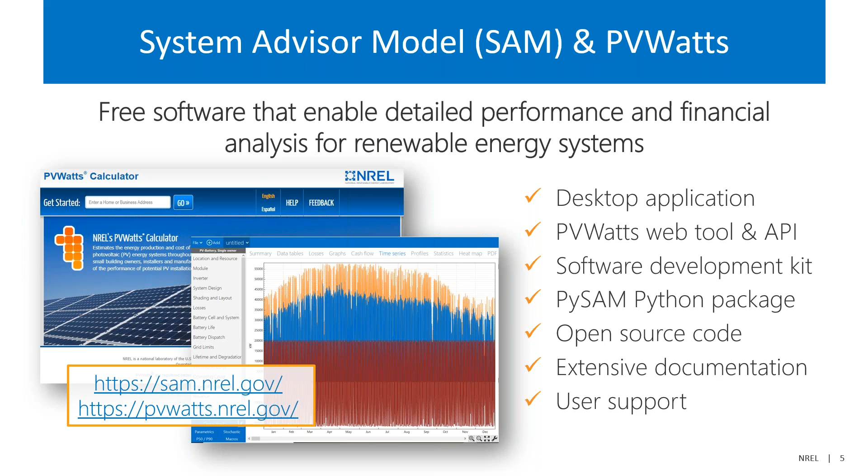SAM has a very large user base, and you can kind of tell that by the large audience that we have here today. Around the world, SAM is started once every 1.4 minutes. The PVWatts web API receives over 17.5 million hits per month. We have a very international audience, over 200,000 users in over 190 countries.

Some statistics there on our views for the webinars like this one, and plenty of external collaborators in industry such as Sunrun, Enphase, Southern Company, and more. You can see our Google Scholar citations of SAM grow year over year, and a largely US-based audience, but over half of our users are international outside of the US as well. So thank you all for using SAM and for being here today.

Just quick funding acknowledgements and some information about the tools we'll be talking about today. So these features were developed and input into SAM as part of a project with Sandia National Labs, as I mentioned previously. That work was funded by DOE's Solar Energy Technologies Office, SETO. This work happened between the years 2021 and 2023, and these features have been available from SAM version 2022.11.21 onward. So they became first available in 2022 and are still available as of today, the 2023 version.

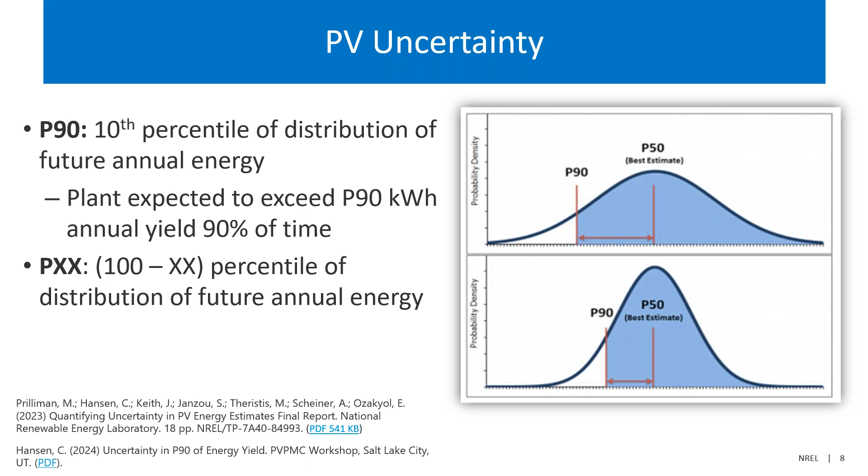So we're talking about uncertainty in the form of probability of exceedance. So when we talk about a P90 value, that is the 10th percentile of the distribution of future annual energy, or what the plant is expected to exceed in annual energy yield 90% of the time. That number could be for any value. For example, a P50 would be the 50th percentile of the distribution, or your best guess average annual energy yield, or it could be P10, P75, any of those values, just that percentile of the distribution of future annual energy yield.

We're focused on the uncertainty tools developed for the PV models, particularly the detailed PV model and PVWatts, which account for both the variability in weather and the lack of knowledge of future weather, in addition to model and parameter uncertainty. There are some uncertainty tools in other SAM renewable technologies, such as wind and other technologies, but those only calculate P50 and P90 based on the variability in the weather. Whereas the PV has uncertainty, as I mentioned, due to the weather variability year to year, the lack of knowledge of future weather, modeler skill, and the model and parameter uncertainty.

The big part of this project was to separate the uncertainty in PV yield estimates into two different categories. Aleatory, which is defined as uncertainty that cannot be reduced with improved measurements or models. An example of this is future energy that cannot fully be known. And the epistemic uncertainty, which is the uncertainty that we can reduce with more accuracy, better measurements, improved models, that kind of thing. And the example I have here is for temperature coefficients. So the key thing of this uncertainty feature is to look at the aleatory and epistemic uncertainties separately and combined to get a better understanding of what we can improve in our uncertainties and where the main uncertainty in the annual energy yield lies.

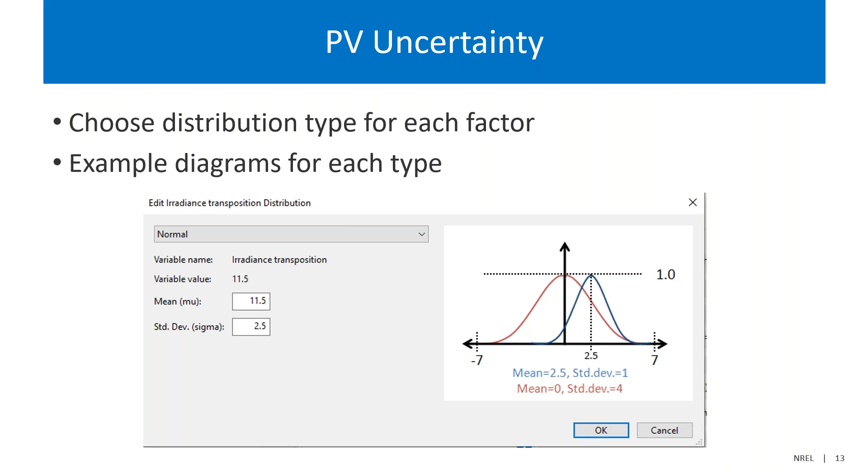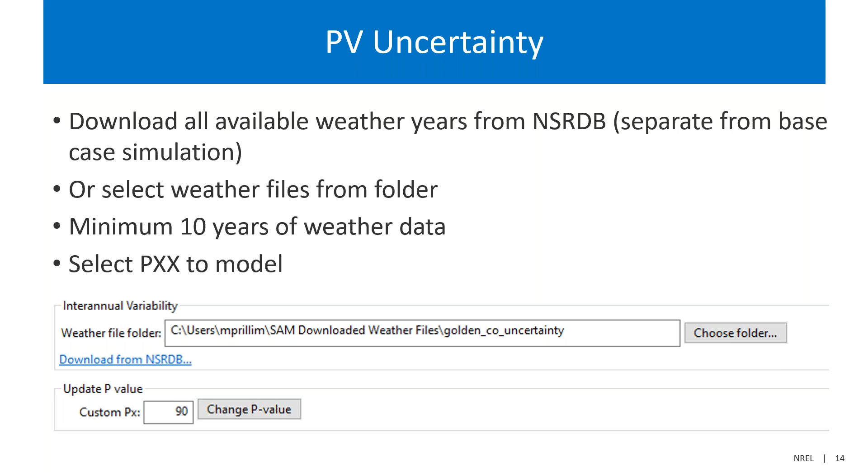From the uncertainty tool in SAM, which we'll get to in the demo in a second, you can import your own weather files. You need a minimum of 10 years of weather data to run these uncertainty calculations. Or you can, from the National Solar Radiation Database, an NREL product, download all the available years of weather that the NSRDB has for that site. And you can also modify which probability of exceedance value to model, whether it's a P90, P50, or what you want to look at in your results. And finally, when you analyze your results, you can look at the combined, aleatory only and epistemic only uncertainty results through different graphs, and then you can export the data and look at it that way. So we'll get to that more in the live demo.

So those are the slides. I will pause to let Janine or Paul let me know if there's any show-stopping questions to get to before we move over to SAM. None at this point. Go ahead and proceed. Okay.

So when you open SAM, this will be the front page that you'll see. I will start a new project. And under photovoltaic, you will have the option for detailed PV model and PVWatts. I will do the detailed PV model in this case. And for this example, I will use an LCOE calculator model just with a simplified financial structure. The uncertainty modeling that we'll go over won't have any impact on your financial analysis within SAM. It can be used externally, though.

So that will load in and you'll see a variety of different model categories here that'll be important for defining some of our factors. And then to look at the specific uncertainty tool, you'll notice under the simulate button, we have this uncertainty button. We'll click that and that will take us to our interface for the uncertainty tool. So I'll actually switch over to a different tab where I have one already started.

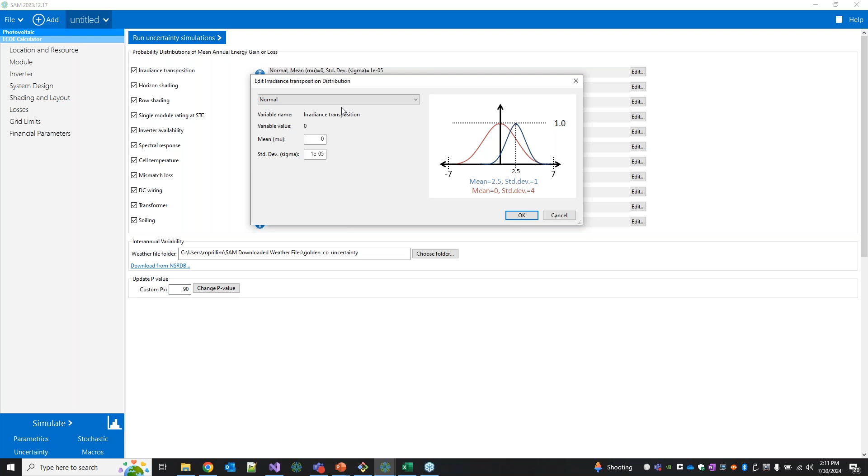So if I wanted to change one of these distributions, I would go to this edit button on the side here. I would choose from my different distribution types, whether it's normal or triangular or others. And I would specify the relevant variables and then click OK to set that change. Each one has a helpful descriptive text on these icons on the left to give you a better idea of what's accounted for in these categories.

And you'll notice that some of these, like the irradiance transposition, spectral response, and cell temperature are 0. And when I initially got this page, the boxes were checked. And that is because in our default SAM modeling, we are accounting for these models. We are running transposition models in our base calculations. We are accounting for spectral response in the base case simulations. And we are modeling cell temperature in those simulations. So as not to double count those, I was unchecking these boxes. This is an example of decisions you can make in quantifying these cases.

Other categories were not by default modeled in this case. A good example would be maybe if you're modeling, instead of using GHI or DNI and diffuse irradiance with a transposition model, maybe you're using measured POA. You might want to change this to account for the measurement uncertainty and how you got to that POA, plane of array irradiance, in your model.

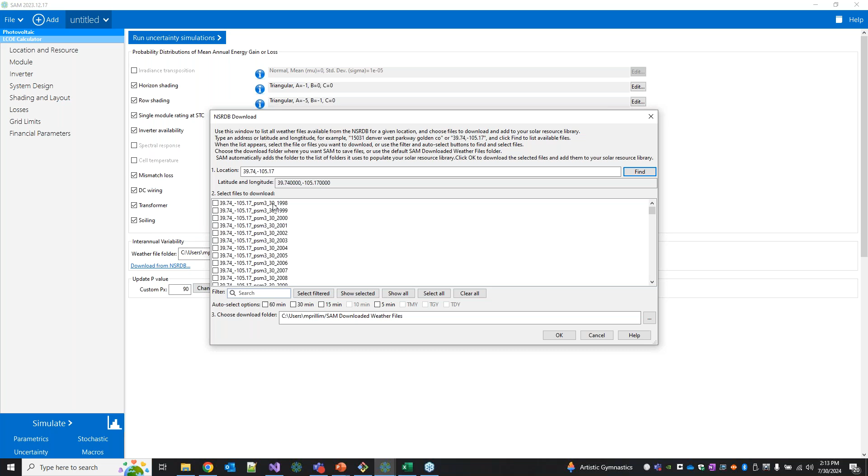Once we have these defined, you can look at your weather folder. You can choose a folder that has only the relevant weather for your system. So I have an example folder here with all the weather for Golden, Colorado. Or you can click this download from NSRDB down here, and you can search by your latitude and longitude for what weather data is available from the NSRDB for your system. And you can download all those into a folder from this interface. You can, as I mentioned in the slides, calculate P90 or change this value.

So when I finally have all this set up, I will click Run Uncertainty Simulations here. It's important to run this one. This Simulate button is for the base case simulation, whereas this is running our uncertainty calculations. So I'll click Run there.

I'll note that while this is running, for these types of cases, if you're running this initial case, it'll run faster without a detailed financial model attached to the PV. So that's why I ran an LCOE calculator case for this example. You could also run it without a financial model.

And then we can see results loaded down here. We have graphs for the overall uncertainty, which is the combined epistemic and aleatory results, only the results due to the interannual variability or the aleatory, and then the results from the epistemic uncertainty factors and that combined product P90 value. Each of these graphs has different bins with a percentage of data points within those bins on the left y-axis, and on the right y-axis they have a cumulative distribution function of all the different data points.

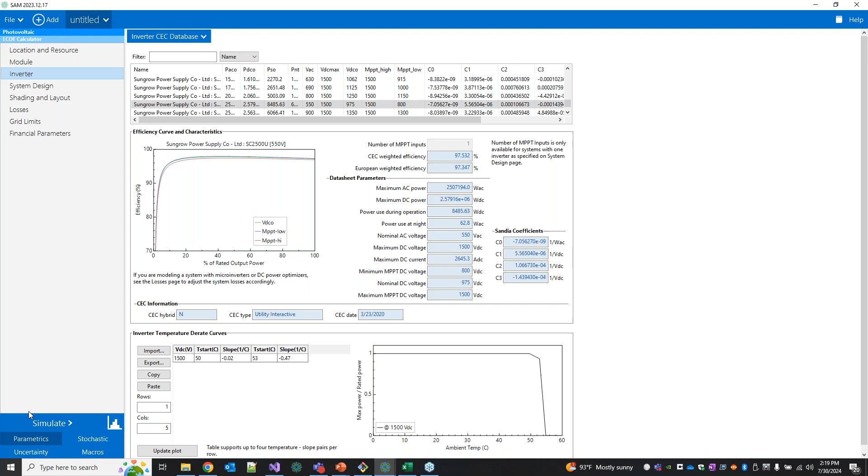And then if we click simulate on this base case, that will get you one annual energy result and basically one calculation. And then if we go to the uncertainty, this is looking at, let's say, 20 years of weather data in this example, times 1,000 samples, and that's getting you 20,000 estimates of annual energy, and looking at the uncertainty based on these factors and the different weather data.

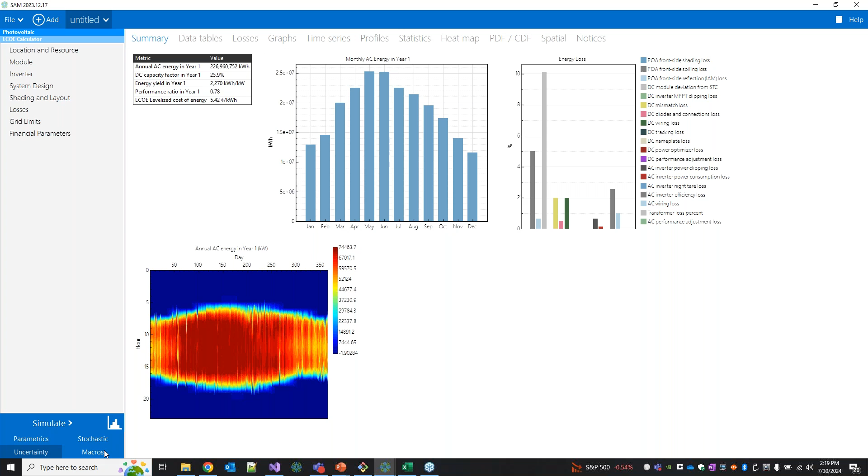So this has a lot more data, but this is only looking at annual energy, whereas when I click the base case simulate here, you can look at the results from that case with this little button to the right of it. You have more granular information on losses for that base case simulation and financial results if you're running your financial model here as well. So this uncertainty tool was built to focus on the uncertainty in the annual energy and look at those different probability of exceedance values for that annual energy yield.

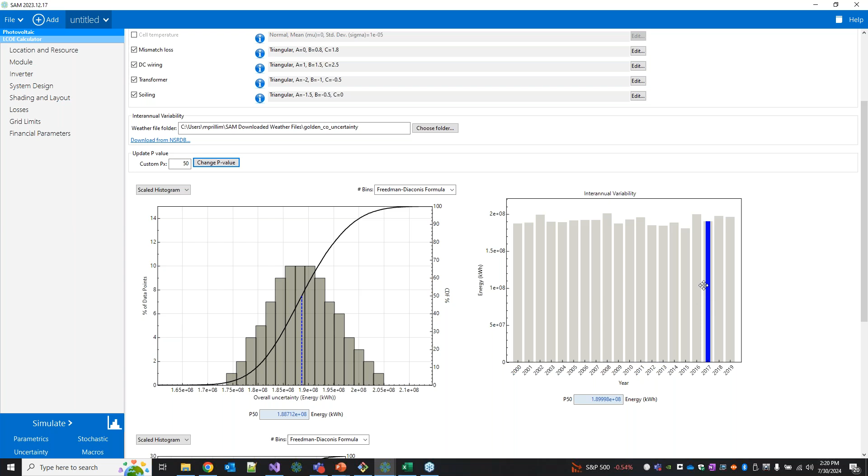Fantastic. We have a few clarifying questions, so we'll go in what I hope is a logical order. One is asking if you could provide a little bit more detail on how to interpret these figures that you're showing on the screen here. Sure. So I'll use the combined uncertainty as a starting point. On this graph, we have two y-axes. This left axis is the percentage of data points.

This corresponds to these different bins, these different columns here, where each bin has a percentage of data points where the overall energy yield falls between those values. So it's counting where your annual energy yield lies as a percentage of the data points within these evenly spaced bins across the range. And then the right y-axis is the cumulative distribution function, which is counting up all the results, the simulations, and where each energy prediction yield lies.

So our P50 is falling right in the middle of that distribution function. So that's where that 50% mark is. If I changed it to 90, then that would be our P90, or our 10th percentile of that future energy yield. So that's where that blue line lies in my graph. And if I export this, maybe it'd be a little bit clearer looking at it in Excel.

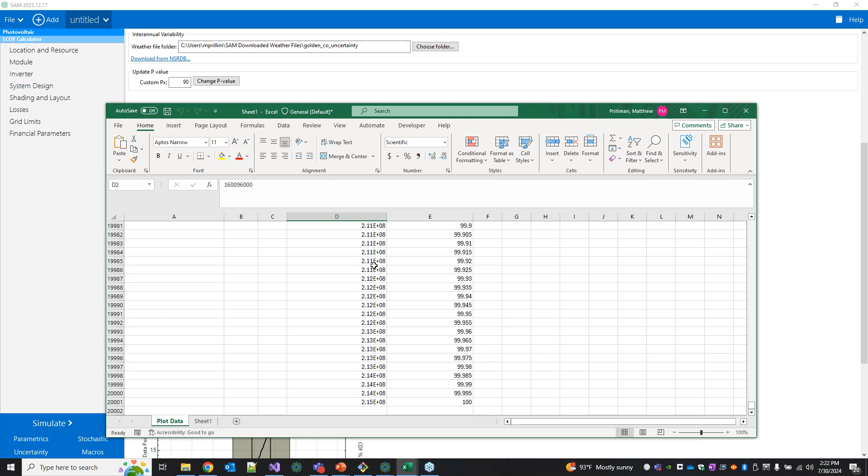We see our data points of kind of where, how many percentage of our data points do not exceed this overall uncertainty in these different bins, in these first two columns. And then in the right-hand column, it's counting all of our 20,000 simulations and counting up, going from 0% of our data points to 100, just counting up, kind of listing them in rank order of where they fall and where our P50 falls, basically. So I hope that cleared things up a little bit.

Let me go into more detail on the other two. Similar things for the other two graphs. This is based on our weather data. So it's picking the weather year that has the P90 or the 10th percentile result for that, just based on the variability in weather data. So that's this blue bar here. If I change it to P50, it'll pick our P50 weather year instead.

And this bottom graph is just based on the combination of the factors or the fraction of annual energy based on these. So these factors in annual energy are percent in annual energy. So it's kind of a 1 minus, let's say this were 2%. 1 minus 2%, then that would be a 0.98 average. And then with the standard deviation,

either in positive or negative direction, it would randomly sample that 1,000 times, and it would multiply that by the samples of each of the rest of these factors, and then running this, it'll have the same kind of binning of that final fraction based on all the factor products and the same percentage of data points in the different bins, and then the cumulative distribution function that finds the P50 of just that factor that gets applied to the base case from the weather year.

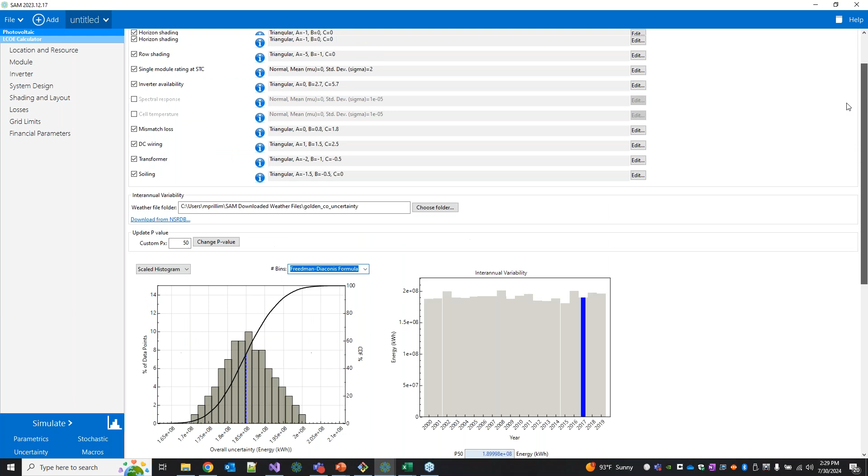Thanks, Matt. There are a few questions that I'll cover for you to give you a little bit of break on talking, because I know you've been talking for a bit now.

There's one asking that says the uncertainty tools seem to be available for detailed PV, but not the PV battery. Instead, the button says P50, P90. What is the difference, and will uncertainty be available for PV battery? So I'll go ahead and take that one. The button in the other models that says P50 and P90 was our previous iteration of a first step at uncertainty analysis, and Matt is going to go ahead and pull up that user interface right now. Thank you, Matt.

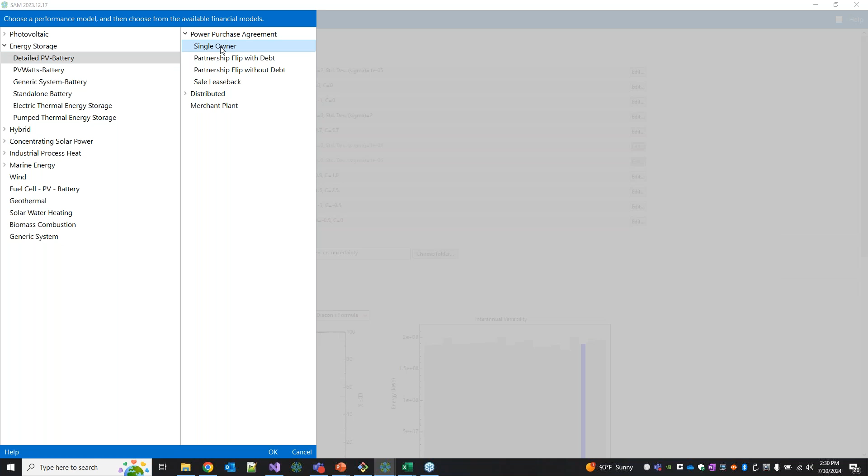That user interface deals just with the weather uncertainty, so it's basically the same as what Matt was showing for selecting a folder of weather files that you want to run the simulation with, and then sorting those into how much variation in annual energy you get.

The reason that we don't have this detailed uncertainty feature for all of the other technologies really boils down to a lack of data to provide some of those categories for the sources of uncertainty that you define with distributions, as well as some lack of data on what those distributions should be as defaults. However, we would love to expand this feature to other models, and we're hopeful that we would be able to get some funding to do that in the future.

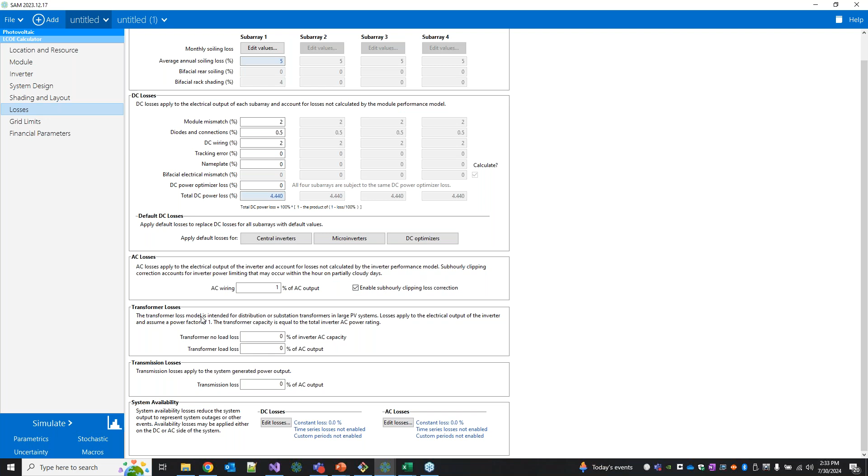And for an example, we don't have explicit inverter availability modeling in the base case, so we do have that factor here for uncertainty in annual energy due to inverter availability. So yeah, that's how it works for a lot of these models. If you turn on the model option in the base case, it will be run in all of the subsequent uncertainty calculations.

So if you, for example, turned on the self-shading model and you went back to the uncertainty, you might want to take out the row-to-row shading uncertainty in here because you don't want to double count that in your results. Hopefully that clarified a little bit.

Thanks, Matt. There's a question about, is the uncertainty feature always on an annual basis? And if so, is there any work on shorter timescales? Yeah, so at the moment, yes, it's only looking at annual energy. That'd be another thing, like Janine mentioned, future requests to look at other timescales or monthly energy or that kind of thing. To expand that capability would be kind of a new feature.

And dependent on funding and user interest. So we'd definitely like to hear what other timescales people are wanting to do this kind of uncertainty analysis on.

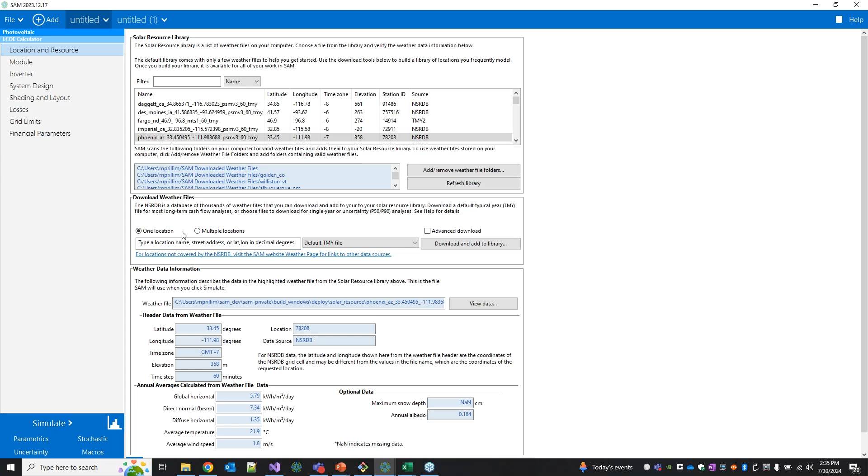Thanks. And there's a couple questions asking for a little bit of clarification of what you mean by double counting the uncertainty for something, which maybe I can tackle again to give you a little bit of a break on questions. So when Matt is saying that, for example, the irradiance transposition, we do model the transposition specifically, and so you may want to disable that uncertainty category.

There are some sources in the literature that don't disaggregate the effect of the irradiance transposition model from the uncertainty in that model. And so if you are looking at a reference like that, it would be double counting to use that value. For example, it might say it's something like 10 or 14%. I believe that was in one of the IEA reports. Then you would be double counting the effect of the irradiance transposition model.

So you could still leave that source of uncertainty checked on the uncertainty page. You just need to make sure that the magnitude of the error you're putting in represents only the effect of that uncertainty on the annual energy and not the effect of the model itself. So if you believe that the uncertainty in, for example, your cell temperature model or your irradiance transposition model is sufficiently small that you want to ignore it, you might uncheck some of those boxes.

Hopefully that helps clarify what Matt is talking about when he's talking about double counting the sources of uncertainty. We're really just making sure that you don't include any effect of the model itself when you're assigning these values in this user interface. Anything you want to add to that, Matt? No, I think that was a very good clarification, because this stuff can get pretty convoluted pretty quickly with the modeling and the factors. So thank you for that.

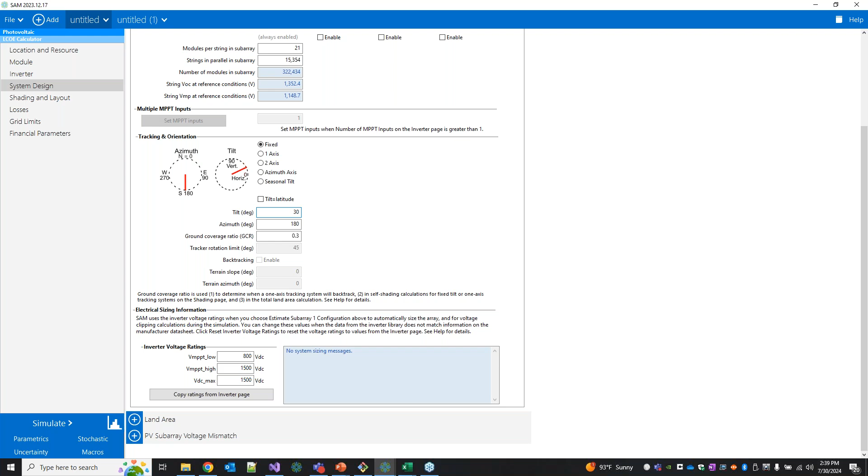Okay, this isn't working right because the tilt is at 0. So let's change that and try again. So there's a very basic example of the kind of outputs that we get from this macro for a sensitivity analysis. You can also vary inputs parametrically through this parametrics tool and do things that way as well. So you can look at some sensitivities that way. So lots of different features here.

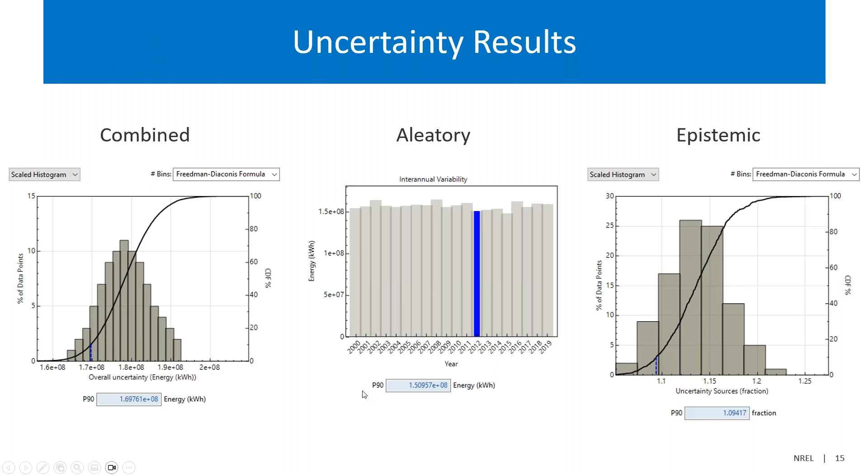There's also another question that I think is worth reiterating verbally for everyone, which is someone asking what version of SAM Matt is using, since they don't see the checkbox in their version. Matt, would you like to clarify that? Yeah, sorry for the confusion. So I am working off a development version of the most recent release. So currently, if you open SAM, you will not see these checkboxes.

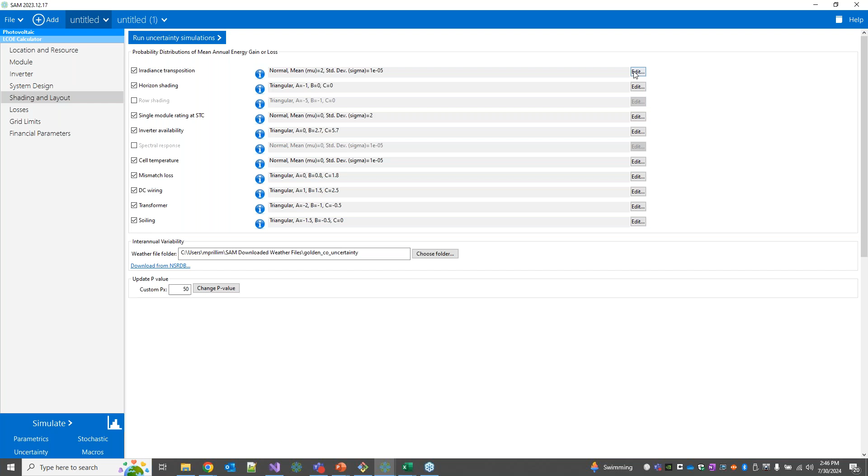And if you want to zero out these values in the meantime, the thing to do would be to use a normal distribution with a mean of 0 and a very small but non-zero standard deviation, and that should work. But these updates to some of the default values and the addition of these checkboxes will be coming out in revision 2 of this version of SAM, which will be coming out hopefully in the next week or so. So be on the lookout for that very soon.

Thank you, Matt. So for any future folks watching the recording of this, likely the version of SAM that you have will have these checkboxes in it.

There were a few questions on the graphs that this produces and different ways to export those graphs. Matt, could you quickly demo this feature, which we have available on most of the graphs in SAM, being able to right-click them? Right. So yeah, I generated these graphs here. I right-click and there are lots of different options to copy the data that was used to make the graph. So I showed you earlier tabular results from those graphs. You can export that to CSV or to an Excel file.

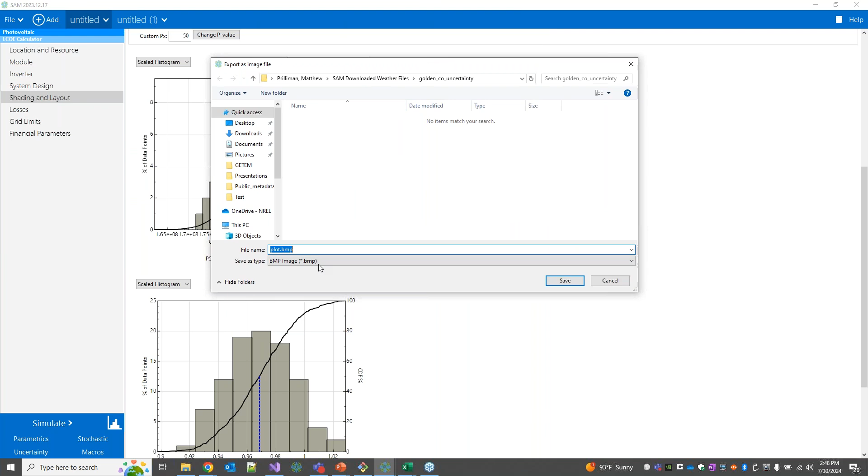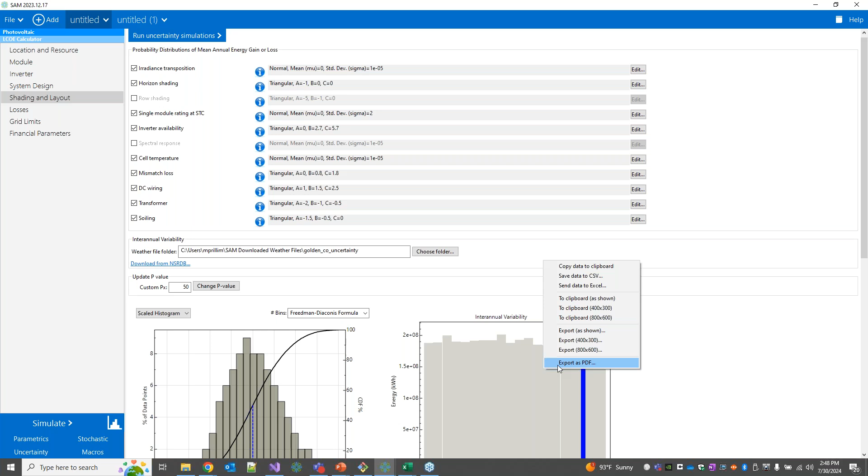Excel, yeah. You can save the image to clipboard as an image file, or copy it to clipboard, or export as an image. So if I do that, it'll save it as a file. You can save it as a PNG, JPEG, or BMP file and save that to your files. Thank you. Or I'll export as a PDF and do the same thing, but in PDF format. So lots of export options for images, for reports, or for the raw data used to make these graphs so that you can then take that into your own analysis.

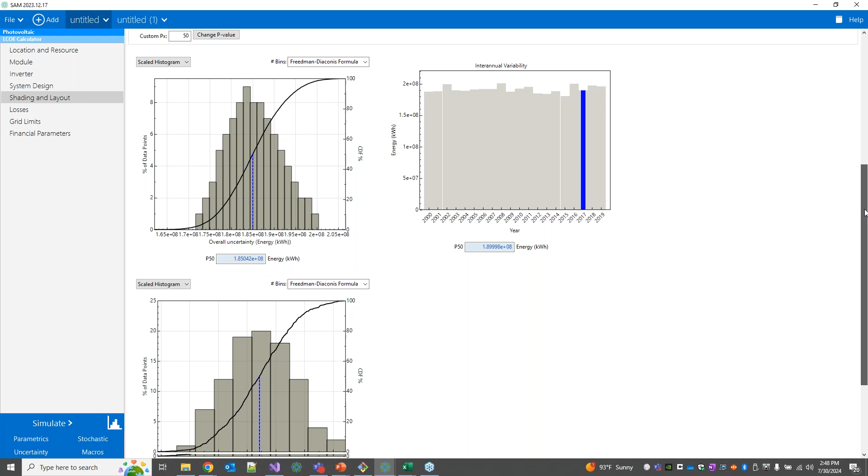Fantastic. Thanks, Matt. We got a few questions asking about what module or inverter or system tilt or things like that these simulations were using. I think probably from people who joined late, so it's worth emphasizing that anything not specified in the actual uncertainty page is using the value that you specified in your base case simulation here.

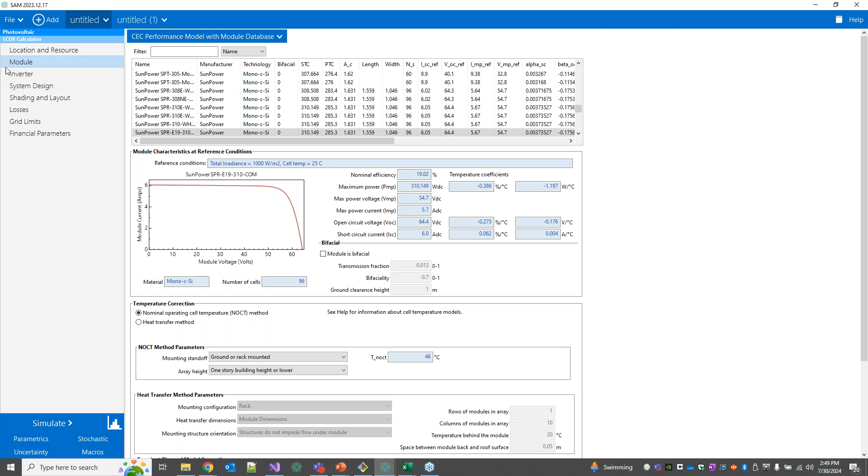So we expect that you would go through and set up your actual system with the correct module, inverter, string length, etc., prior to running your uncertainty analysis, where you would then add on the uncertainty categories that you would like to analyze. And we do have separate videos on the SAM website about setting up PV systems at various scales. So we encourage you to check those out if you need a bit of a primer on how to set up your base case simulation in SAM.

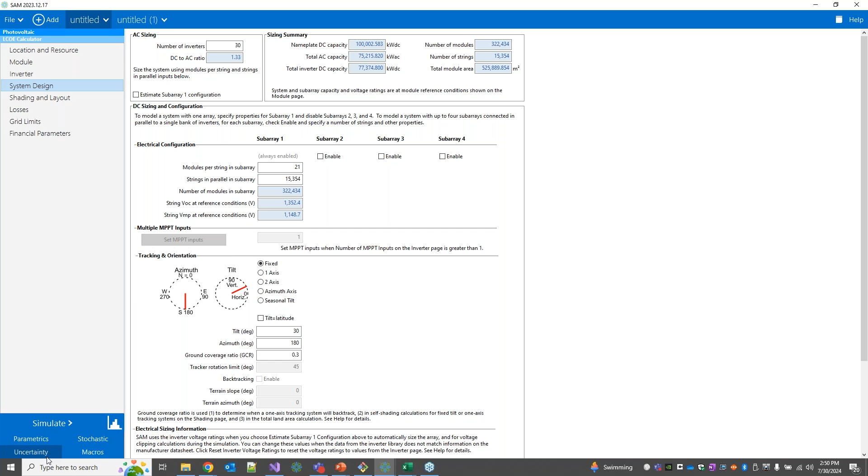There was also a question about probabilistic modeling, and I think it's worth differentiating a little bit. This uncertainty capability is basically using two different ways to combine, as Matt mentioned, the epistemic and aleatory sources of uncertainty. And the reason that we are running it in this particular way is for speed. So we do have a stochastic feature that you can see underneath the simulate box as well.

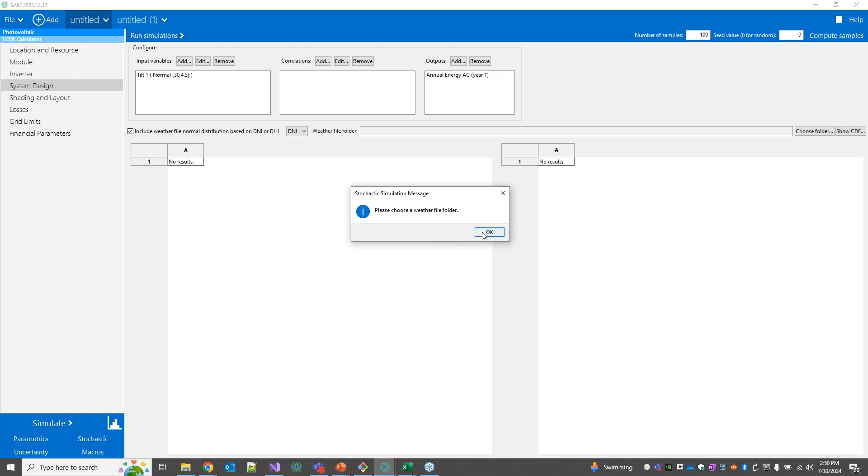That allows you to select any input variable and assign an uncertainty distribution to it. You can add correlations, and then you can look at the effect of that uncertainty on your outputs. And you can add a weather file folder to that feature, much as you can in the uncertainty feature. However, if you wanted to analyze 10 or more different inputs for uncertainty, this starts to get very slow doing it the way that this feature is set up.

This one is more of a true Monte Carlo analysis, running X number of simulations or samples that you specified. And so the uncertainty feature is really a slightly different approach to that, that is faster and more able to combine the epistemic and aleatory sources of uncertainty slightly differently, and then it has the embedded graphing capabilities. So for PV simulations, we do think that the uncertainty approach is a little bit more tractable for many people modeling systems.

Do you have anything you would want to add to that, Matt? No, I think you covered it well. I'm reading through, we still have some questions, but many of them have been answered.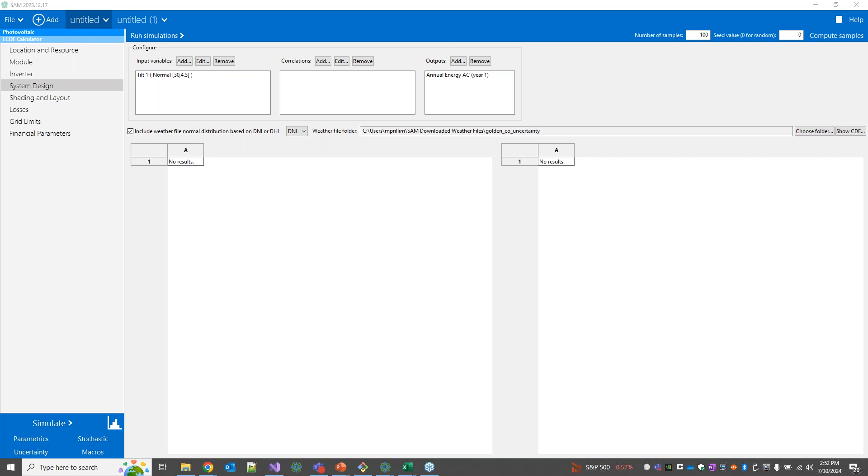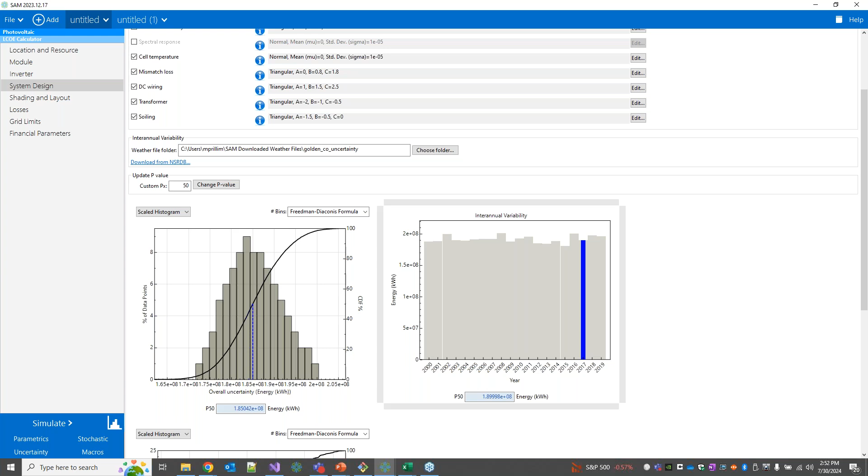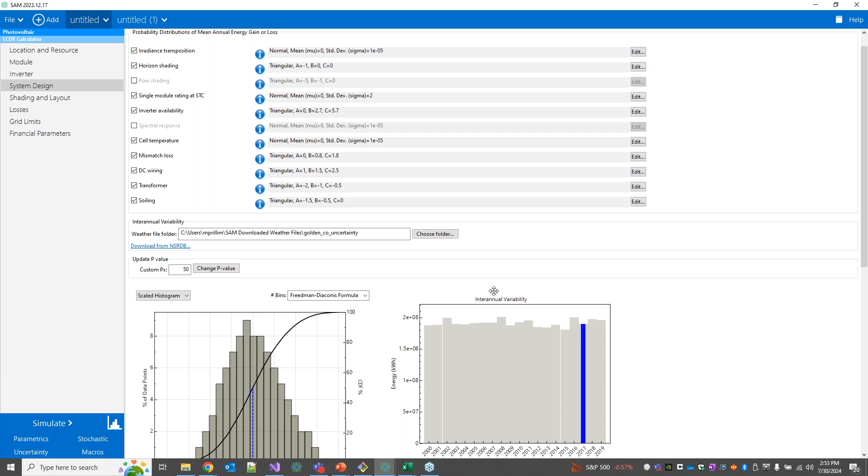There's a question asking a little bit more of an introduction of how the probability of exceedance is used. So that P90 or PXX value that you were talking about. Do you want to take that, Matt, or would you like me to? Yeah, I'll take it. Generally these values are used in yield assessments or yield predictions. This P50 is typically taken as your best guess, or the yield that you expect to be exceeded. You expect your system to outperform this estimate 50% of the time, whereas for a P90 you would expect it to exceed 90% of the time.

So a system underperforming a P90 value would indicate that there's either something wrong with your estimate or your model estimate, or there's an issue with your system. So it's kind of used to evaluate that and look at risk and investment and that kind of thing. So that's generally how they're used in the real world. Yep. Yeah, frequently the financier is the one who cares most about the P90 or whichever metric value they choose.